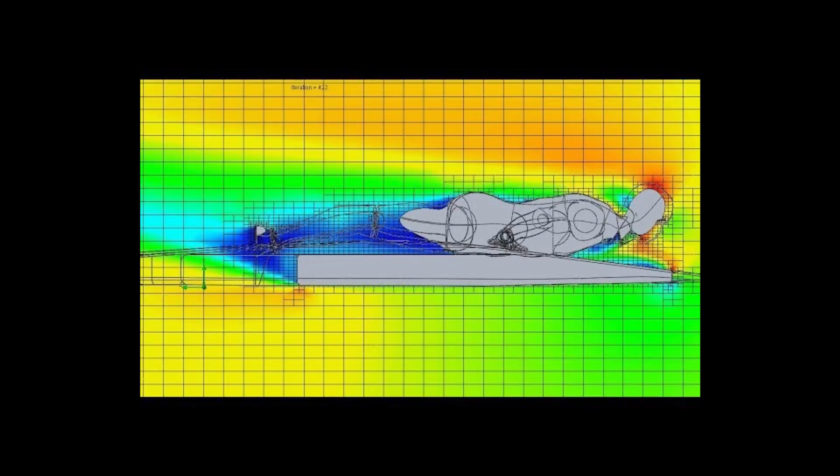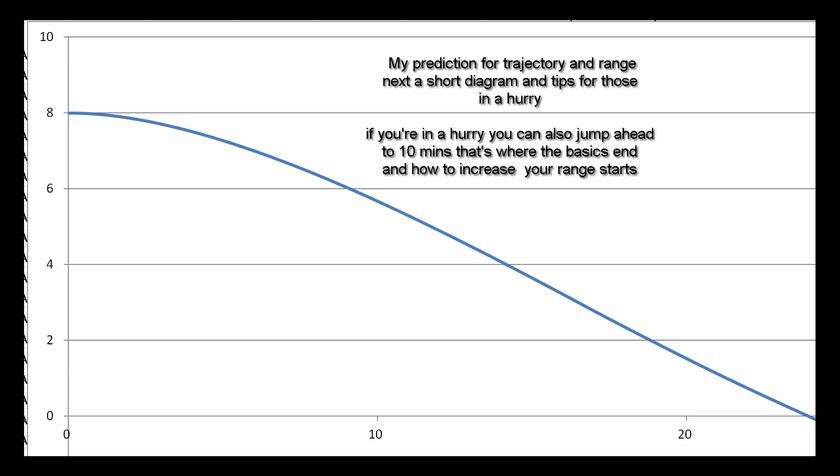Also, this video is somewhat specifically directed at other German people, and I am also German, but I will still make this video in English because it's just the most understood language, and I don't want any English speakers who stumble over this video to just sit there with Fragezeichen over their head and no idea what's going on.

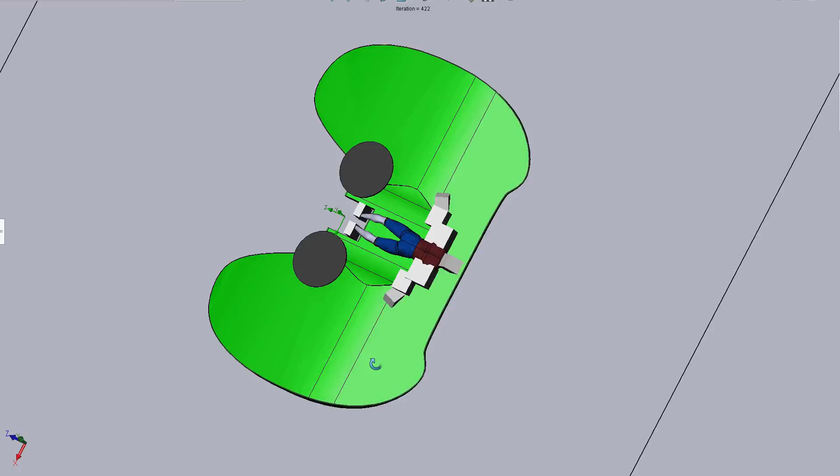So today's video will be a response and analysis to some German YouTubers' first attempt at aviation. I'll keep this short for those who already know, but a short introduction for those who don't know yet. There is an event called the Red Bull Flugtag or Red Bull Flight Day, which, as Wikipedia describes it, is an advertisement event where competitors, quote-unquote, though translated, plunge themselves into the water in self-built, in quotes, flying machines.

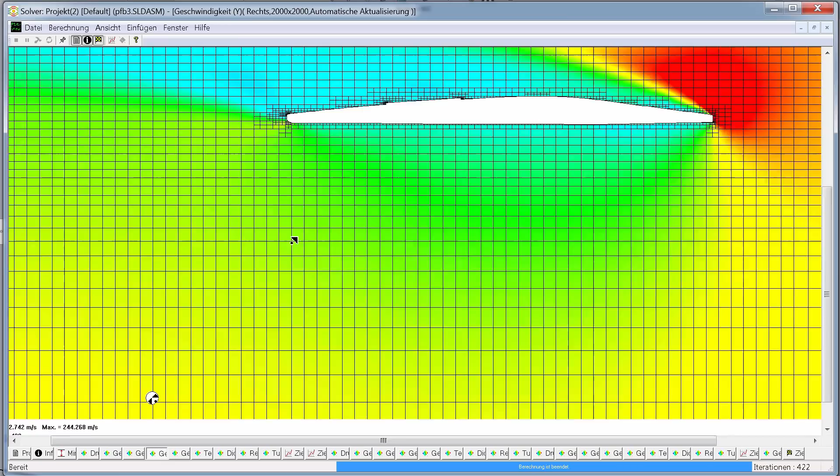So it's a tiny bit off topic for me since it's not the most advanced or professional rocket science ever, but it's all just for fun, and sometimes some actually skilled teams do get quite a distance. They basically jump off a ramp in a muscle-powered or unpowered, uncontrolled glider and glide a few meters down into the water and see how far they can get.

We have, by the way, used this event as an example in university before, though not for an actual technological topic, but actually in a course about English in science and technology, where we've just used it as practice material for talking about it in English, irony going full circle.

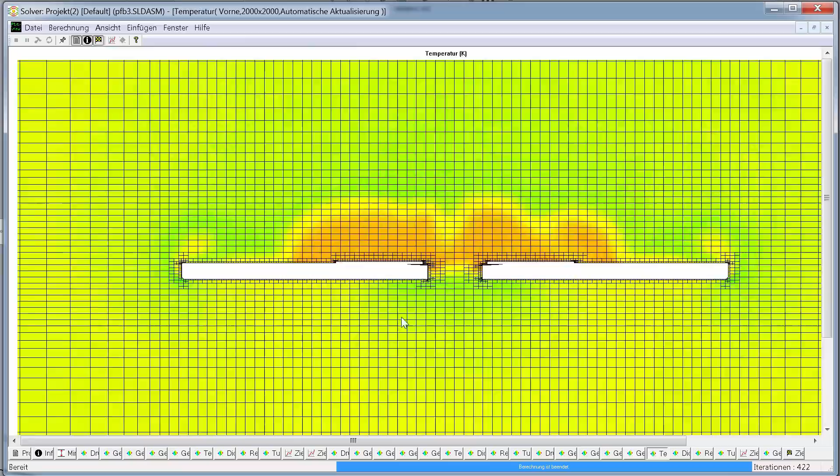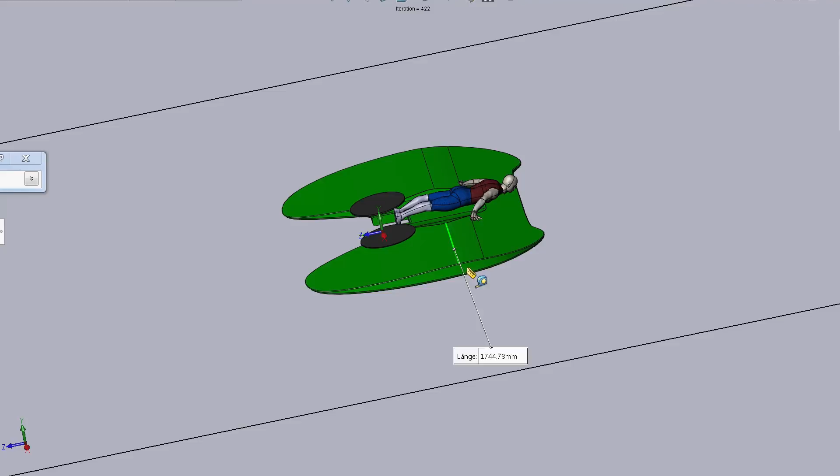Now the reason I'm making a video about this is because some other German YouTubers are competing in it this year, and they too are a little bit off topic for this channel maybe. Usually if I recommend someone, it's also someone who talks about science and spaceflight or astronomy. In this case, they're just some slightly weird German comedian slash let's player group called PietSmiet, but I like them.

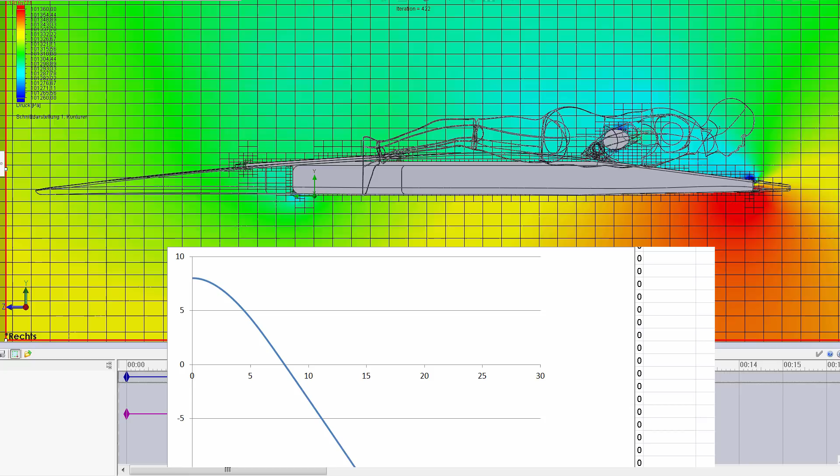I've been watching them for a very long time, and so when they got the chance to get together with another German YouTuber called Nerdy Timber, who makes big things out of wood basically, and two other German YouTubers to build a quote-unquote flying machine for this advertisement event, I thought I'd take that as an opportunity to practice some aerodynamics, explain some basic flight dynamics and aerodynamics on a somewhat entertaining example, and of course give them some final tips for how to get further.

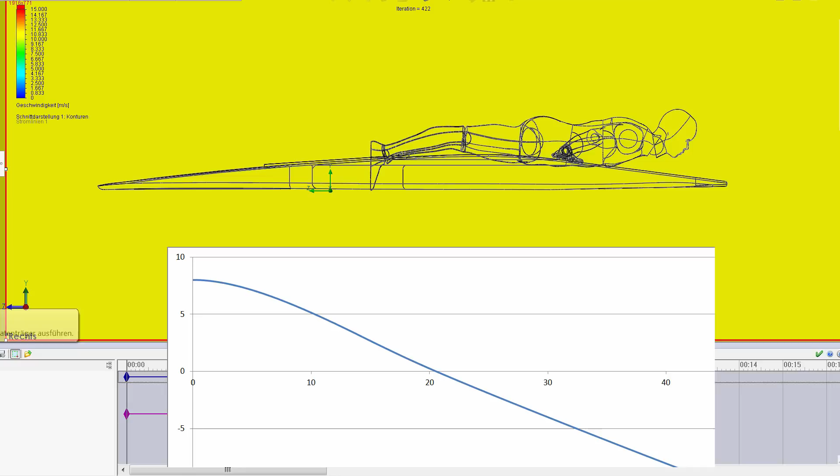So first of all, the very basics, though I already have to clear something up that is sometimes a bit confusing and a bit argued over. What is aerodynamics and what is flight dynamics? This is sometimes a bit confused, and you often see articles or videos called The Basics of Aerodynamics that have absolutely nothing to do with aerodynamics at all and only flight dynamics. So let's give a quick overview over these fields and my methods here.

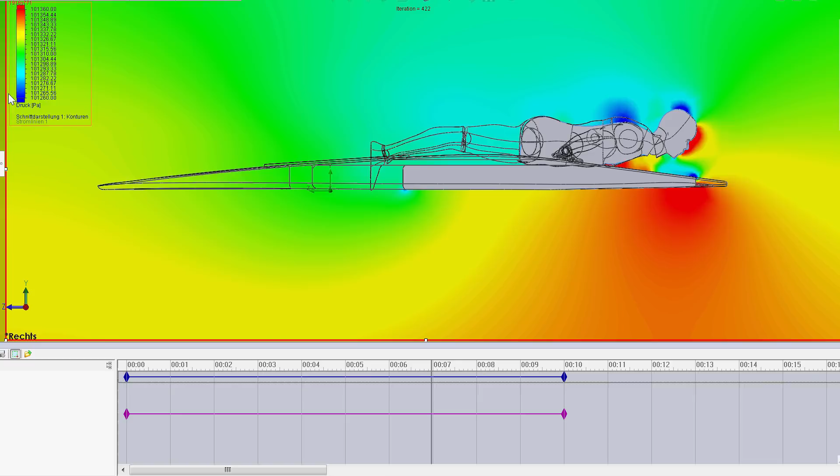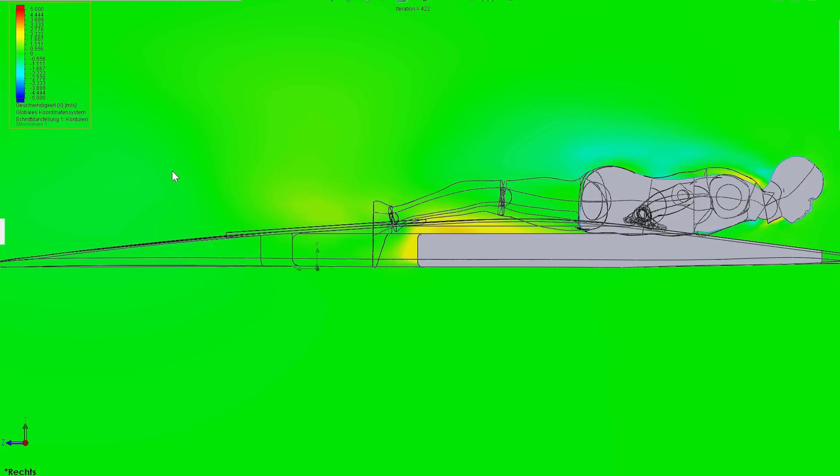So first of all, aerodynamics. Aerodynamics is purely the study of air or sometimes other gases flowing around a geometry. Aerodynamics does not care how heavy your flying machine is, where its center of mass is, or what you're planning to do with it. According to aerodynamics, your flying machine might as well be a hollow surface, since aerodynamics is only the study of how air streams around your flying machine or any other object under certain circumstances.

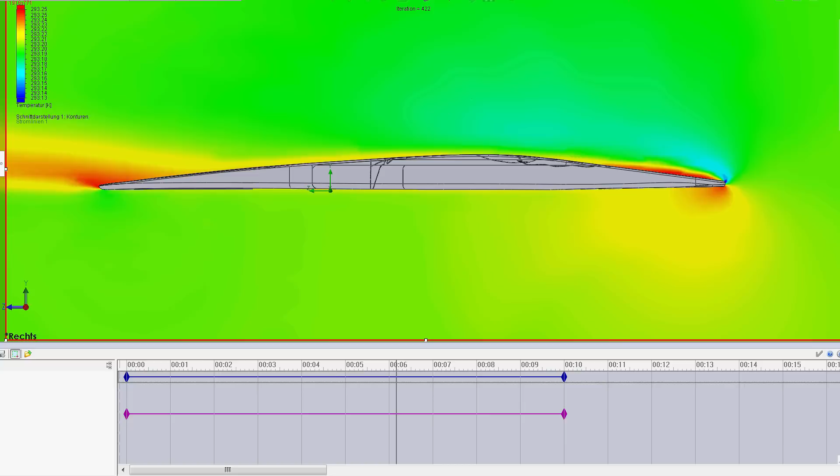So you have your geometry, your size, your outer surface, which might be rough or smooth. You have air approaching it at a certain speed, at a certain angle, with a certain temperature, and maybe the surfaces have a temperature too. And you might have an engine, a propeller, a turbojet, or a rotor or something, and the air streams around that, and you study how the air interacts with the surface and with other air, and changes pressure, and goes into turbulence, and so on. And this can be simulated with quite a bit of detail, though it's actually not an exact science yet.

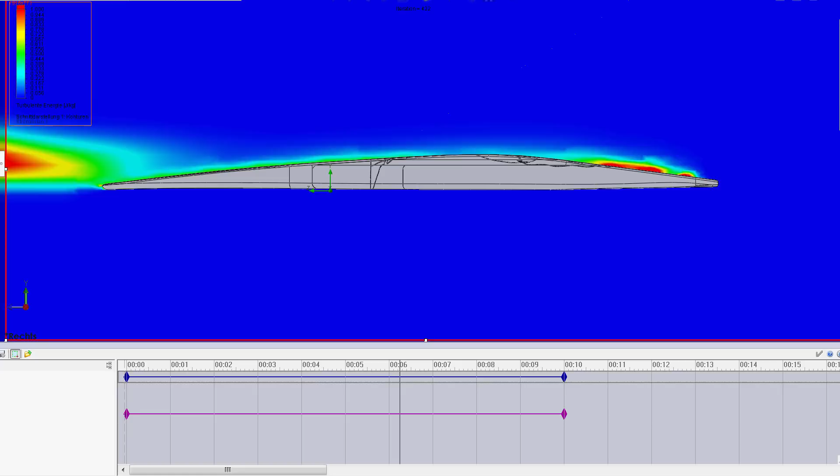The thing is, we do understand how it acts on a large scale, and we do understand how it acts on a very, very tiny scale. We have a very rough idea of how air molecules or atoms in air interact, but those are so many that it basically comes down to statistics, and how air actually acts in a larger quantity is somewhat experimental, and you have to get experimental values which you can then add into a numerical simulation.

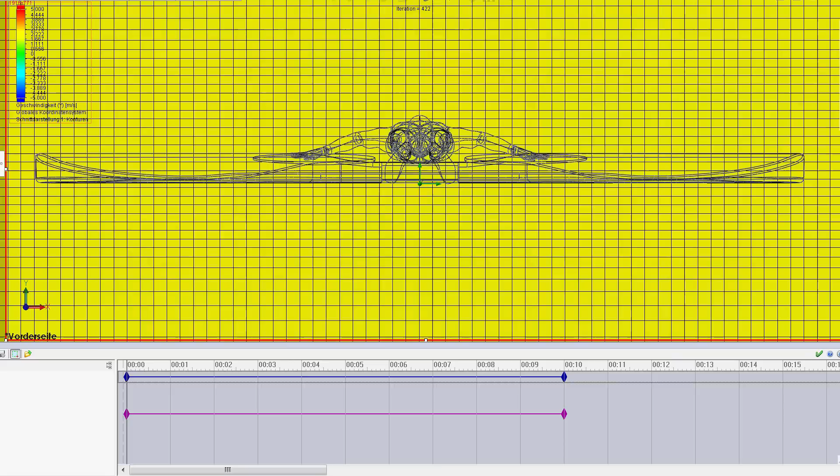Nonetheless, with enough detail, you can get a somewhat accurate idea of how air reacts if it streams onto a certain geometry at a certain angle and speed, how much pressure builds up on which surface, and what kinds of forces then act on the flying machine. So you get a rough graph or table or list of numbers for different speeds and different angles of attack and side slip and rotation and so on, and you get a list of forces acting on each surface of the flying machine, which you can work on and extrapolate on.

Flight dynamics goes the next step, and flight dynamics no longer really cares about the specific detailed interactions of air. It just takes these tables that aerodynamics essentially outputs, and then takes the center of mass of your flying machine, the weight of your flying machine, the thrust of your engines, and so on, and looks at how the aerodynamic forces acting on the surfaces change the path of the flying machine, change the speed of the flying machine, how they create torque and turn the flying machine, which then in turn changes the aerodynamics, changes which numbers you basically look up in these tables.

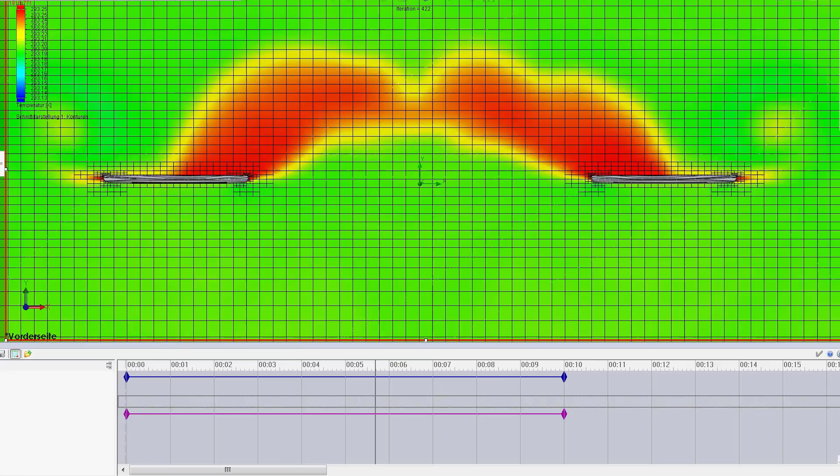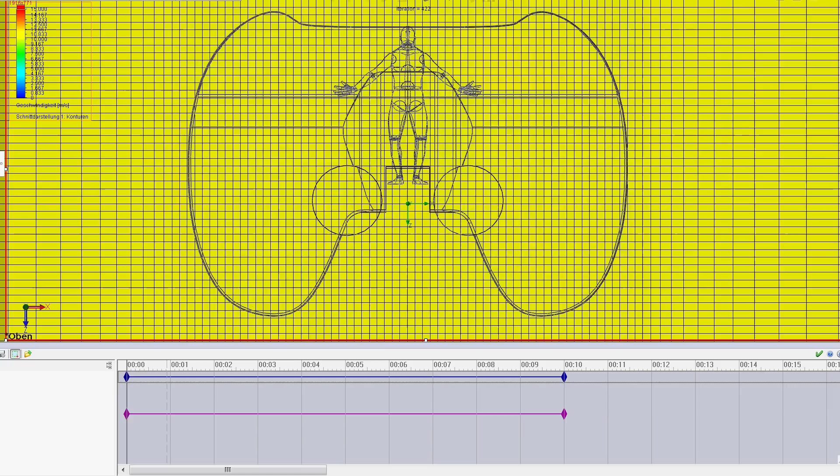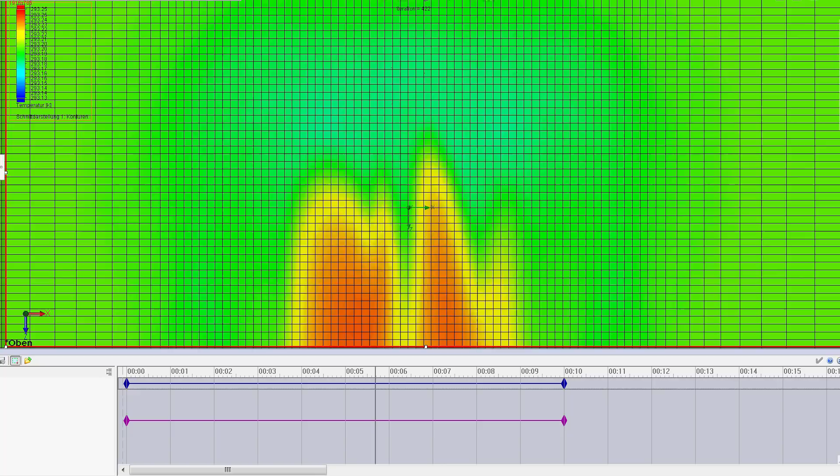And this is where, for example, terms like aerodynamically stable or unstable come from, whereas stable means that if you deviate from a straight path, that will result in forces that basically turn you back onto that straight path, whereas unstable means if you slightly deviate from a straight path, that will result in forces which turn you further in the same direction and make you further deviate from that straight path, making you unstable. Basically, as soon as you turn slightly off your path, you instantly backflip against your will, whereas stable means you are turned back forward.

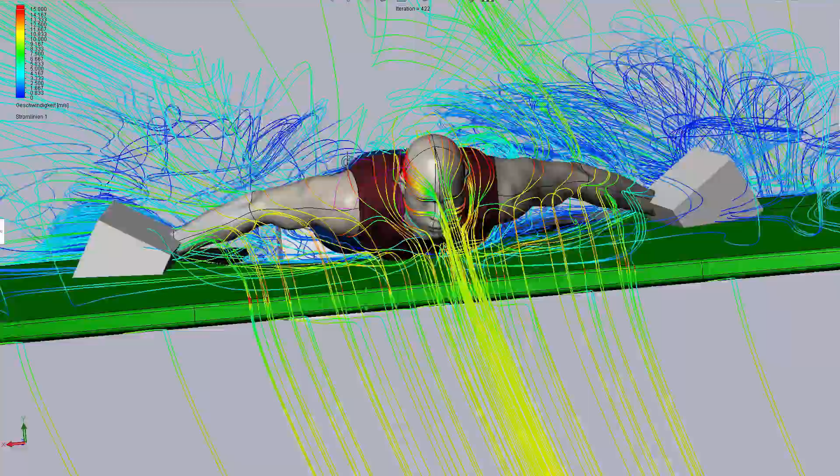Of course, nowadays with modern computers, that is modern supercomputers of the kind I don't have, the kind that cost several $1,000,000, you can do some much more complicated simulations where all these fields interact, structural analysis, flight dynamics, aerodynamics, and then you get into aeroelastics where you look at the feedback loops of how aerodynamics creates a force on a wing, that force bends the wing, that changes the geometry of the wing, that again changes the aerodynamics, that changes the force on the wing, that changes how the wing bends, and so on, and that gets you a feedback loop which you can analyze, and you can do that all in detail using numerics if you have the computing power.

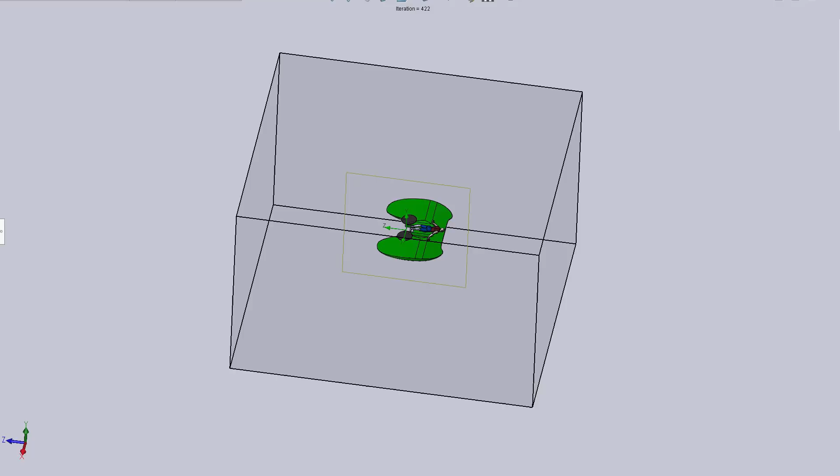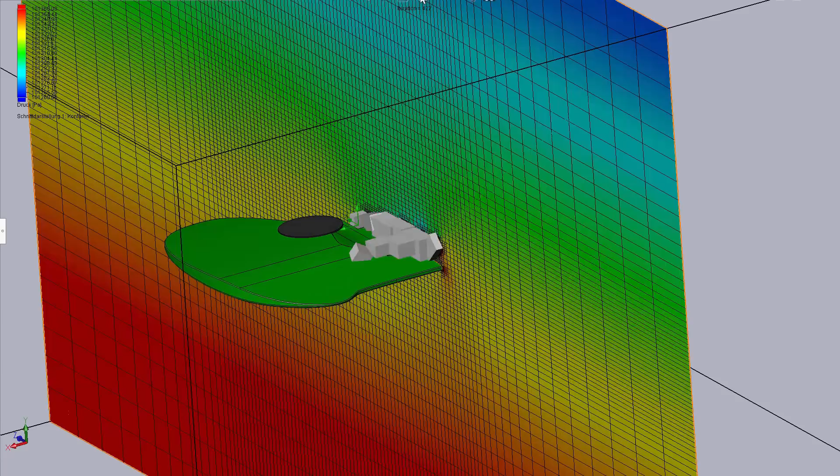But for now I've just started out with doing a basic aerodynamic simulation. I've used the 3D model they uploaded, the measurements and sizes from that 3D model, as well as the video of the flying machine that we already have, to make a rough model in SolidWorks. I then added a human dummy figurine, which is actually something I'm practicing for the first time, since until now I have done quite a few aerodynamic simulations, but usually on either unmanned drones or large aircraft, or at least something with an enclosed cockpit. This is the first time I'm actually using a human dummy to represent an open cockpit glider, or a glider where the human is basically just lying on top.

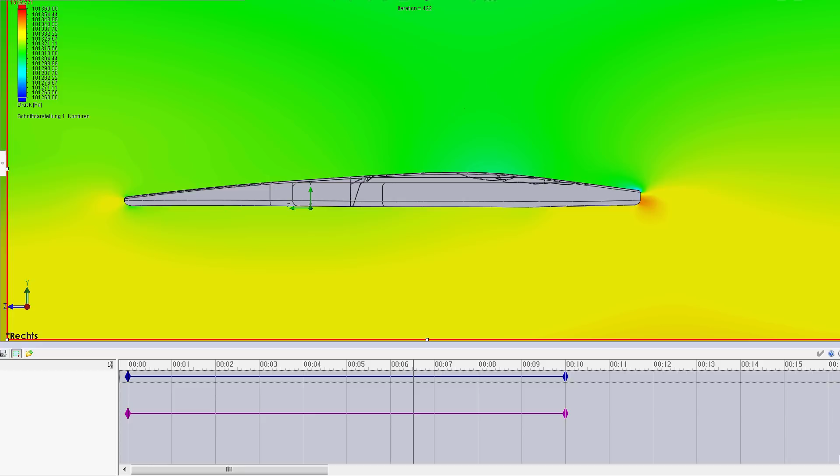So the flying machine looks like a giant PlayStation controller, which is basically their logo, their symbol, and it's not aerodynamically perfect, but that's not the point. It's just for fun. It has to look this way, and it actually turns out surprisingly well. So you take the outer shape, the outer surface of the 3D model, and you take the space around it and separate it up into tiny cubes or cells.

At varying levels of detail, these cells interact with each other, and then you basically go to sleep while your computer works, and when you wake up it has finished up some colorful images of how pressure and speed and turbulence is distributed around the machine.

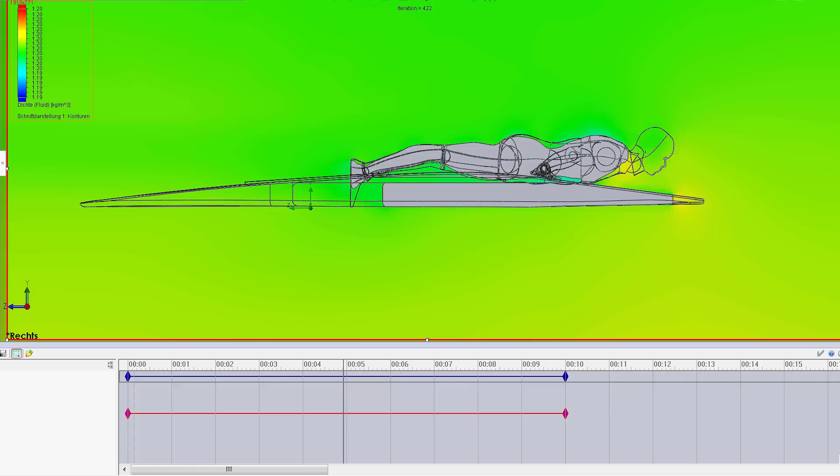With some understanding of basic physics or a bit of experience, you can of course tell some interesting things from these images, like where the average forces are applying, if that thing would be stable or unstable, if there are any critical errors in the aerodynamics. In this case, the only really big issue is that it's slightly stall sensitive, at least without the pilot.

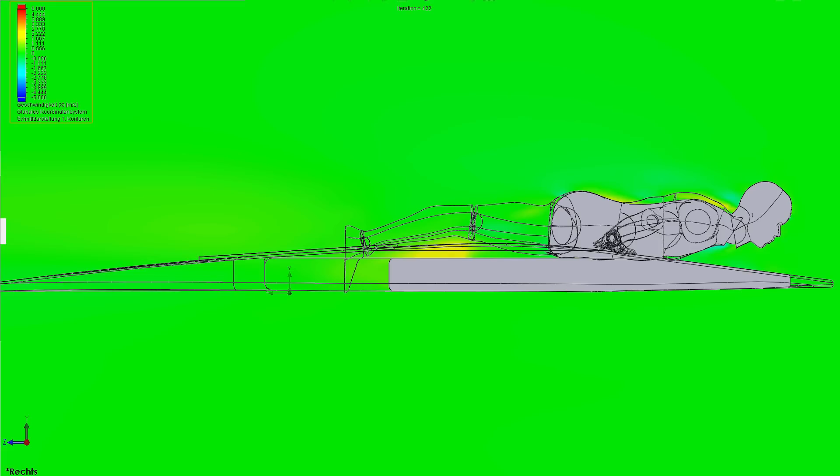I did a simplified simulation without the pilot at first, and that turned out very sensitive to stall because of these bumps in the front of the machine and the straight line connecting them, which basically catches air and turns it into turbulence above the center of the machine.

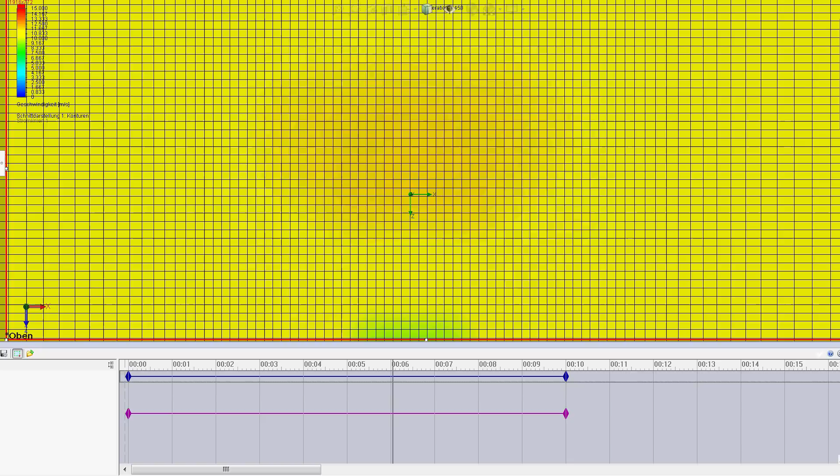Now with the pilot that's actually a bit less of an issue, since the pilot causes some turbulence anyway, but relatively harmless ones that basically counteract these turbulences caused by the straight edge at the front.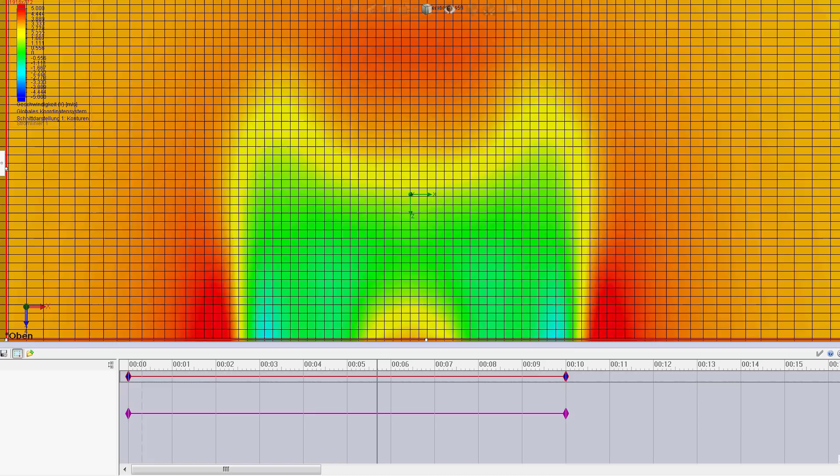I have also uploaded some detailed long videos of the whole analysis of all the colorful images of pressure and airspeed, so you can look at all the details. They're relatively long, no commentary, relatively boring, but if you are interested in the actual details, you can check them out.

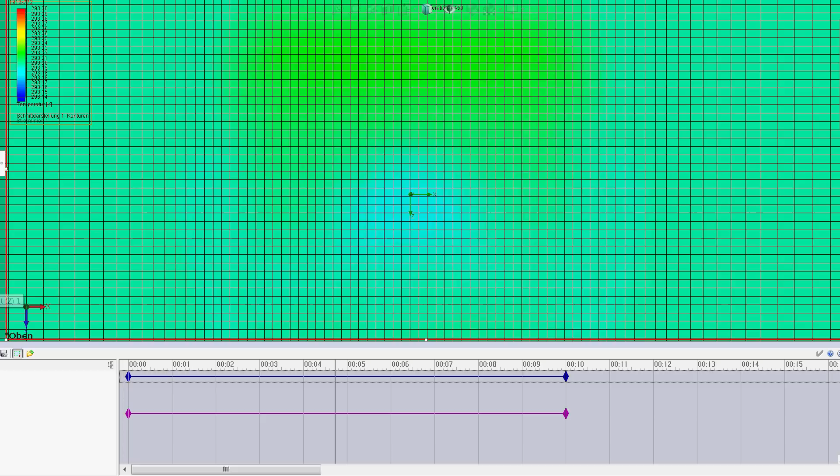Then I looked at these images and actually analyzed them and got the actual forces acting on the machine, the drag, the lift, where these forces on average act on the machine, and that is where we go into flight dynamics, which is basically Newtonian mechanics. We can draw up a very simplified sketch here.

We have the rough outline of the machine, the center of gravity, and that's where we get a little bit of an issue because the pilot is resting on top. And writing with the guy who built the machine, I read that it's roughly 27 kilograms heavy. I'll estimate the pilot at some 80 kilograms or something roughly around that area. So the whole thing is going to be a bit over 100 kilograms, and the flying machine itself is going to contribute the lesser part of that.

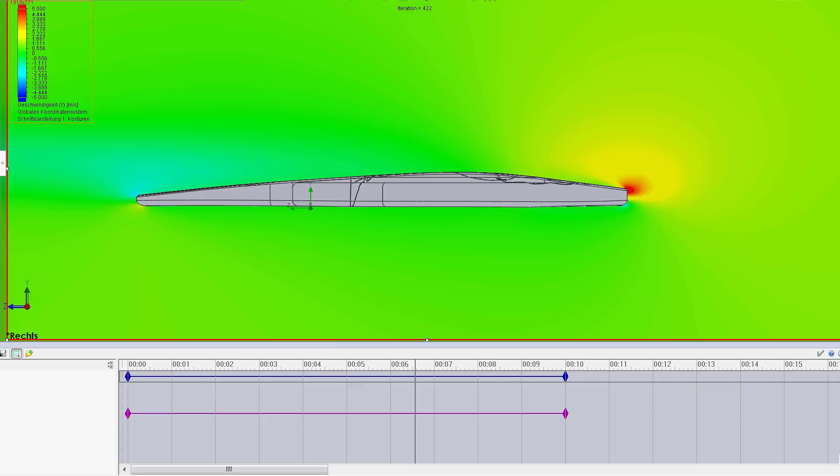So the center of mass is going to be closer to the pilot's center of mass than the machine's own center of mass, which means since the pilot is resting on top, that the center of mass is going to be above the flying machine itself, which is a bit of an issue because while humans do cause some drag, the machine is much bigger.

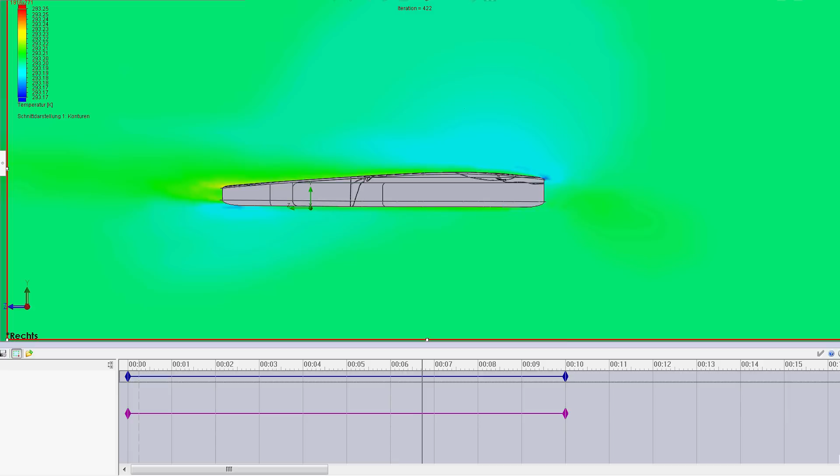It has large wings which are somewhat aerodynamic and don't cause too much drag, but still more than the human, and so the force of drag, the force pulling you backwards as you move forward, is attacking below the center of mass, so the whole thing gets turned around its center of mass basically. So the lower side gets moved backwards, the upper side gets moved forwards, which basically means the nose moves down and you nosedive.

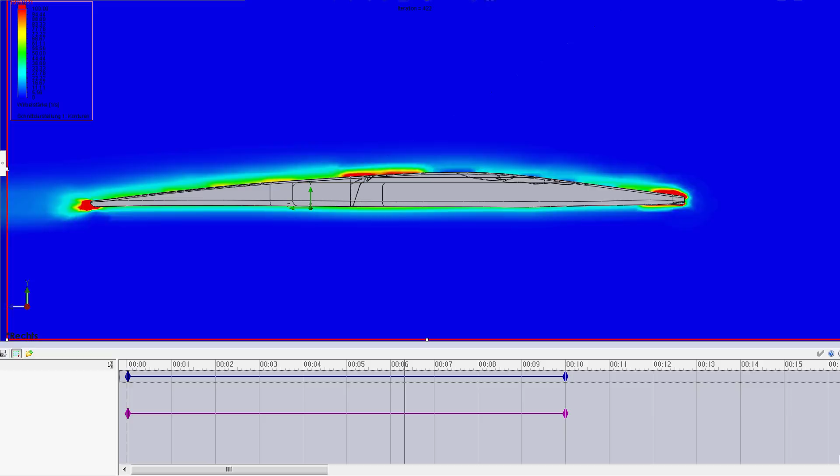However, that's actually not that big an issue, since the whole thing is actually not going too fast anyway, and the drag itself, the parasitic drag as we call it, the drag actually caused by the edges in front and the roughness of your surface and so on, is relatively low, and the strongest forces will be lift.

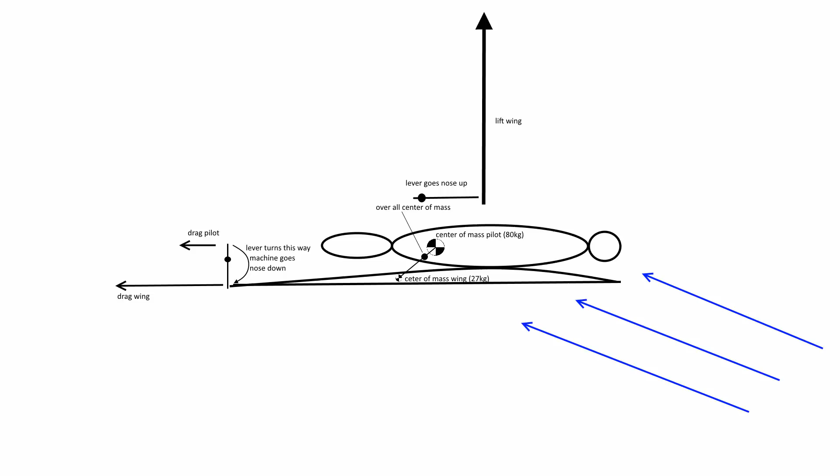So the main part of drag too would be induced drag, that is the drag caused by your own lift and the angle of attack of your wings, where your wings are angled upwards, so your lift is not going straight up but slightly angled, and thus it also pulls you backwards a bit, and that induces a drag called induced drag, which is a direct side effect of lift and thus also attacks in an angle, basically upwards.

So the forces actually pulling the machine straight backwards are actually relatively small. They also attack with a relatively small lever, since the whole thing is rather flat. After all, the pilot is not sitting but lying on top of it.

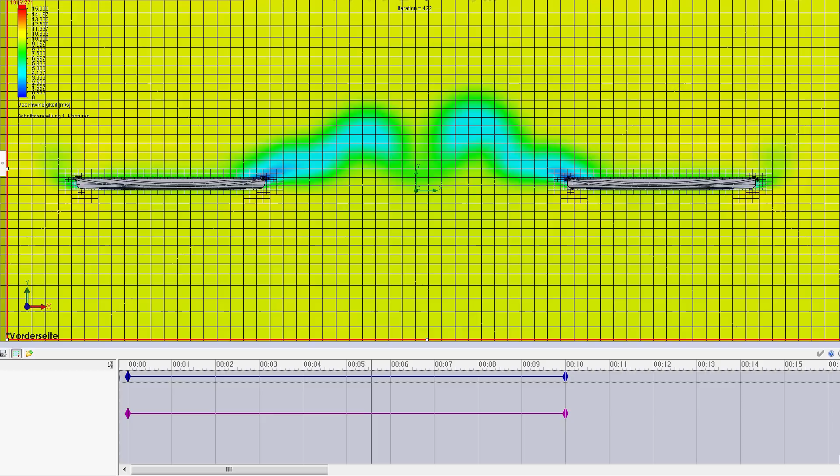And the forces that mostly dominate how the machine will turn and rotate and flip back or forth will be lift itself, and the center of lift, or where the lift attacks under the wing on average, is actually somewhat well lined up with the center of mass, so it shouldn't turn or spin too much.

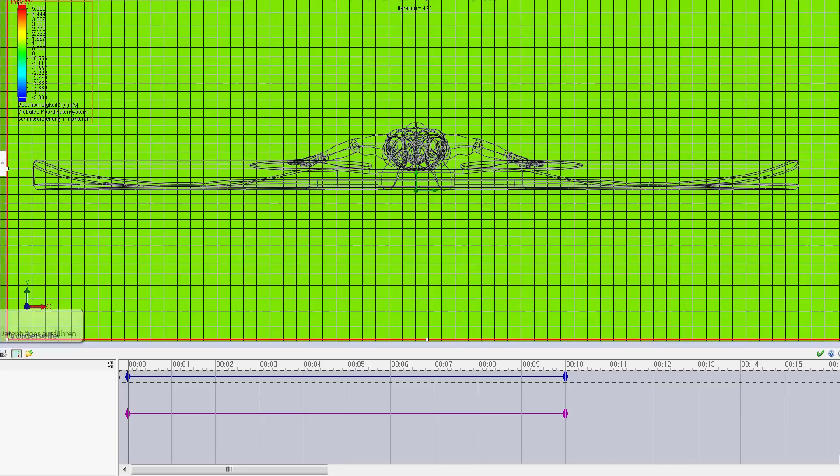Also, of course, jumping down 6 meters, it won't be the longest flight ever, so the machine might simply not have quite the time to actually start rotating, rather just staying close to its original flat position, so stability and such aren't actually that relevant here.

As far as control goes, it will basically be like balancing on a huge gymnastics ball. As the pilot, you can shift your weight forwards or backwards, and if you slightly shift your weight to the tail end of the machine, you will start pulling your nose up, whereas shifting your weight forward to the nose of the machine will basically initiate a nosedive.

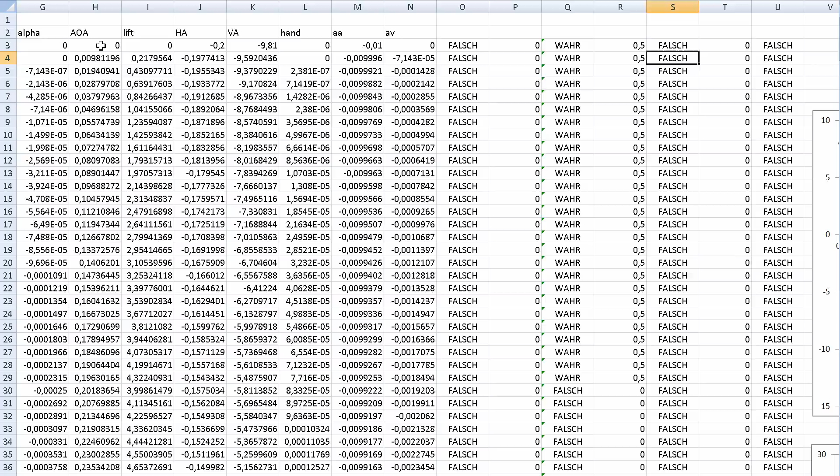So you can try to keep the whole thing somewhat controlled by moving your hands back and forth, but that will hardly be needed over the short time that it will fly. I have actually gone for a trajectory simulation where I've used Excel, since it's not that complicated, it doesn't really take anything more advanced. So this is again just a basic recursive simulation.

You start with your starting position and your starting speed, and then you calculate from that position and speed the forces acting on the machine, extrapolating that from the data points you got from your aerodynamic simulation. You calculate how fast the machine will turn and how that will change the angle of attack and the lift.

And you do that basically in 1/100th of a second steps, and then you enter the next speed, which is a result of the acceleration, and the next position, which is a result of the last position and the speed. Of course, in Excel you can just pull that down and it does that automatically.

So I have roughly calculated for you what your flight trajectory might actually look like, and how far you can get depending on how fast you start, which is very critical. I've plotted the flight trajectory for different speeds, and I've also plotted the maximum distance you could reach as a function of the speed you start at.

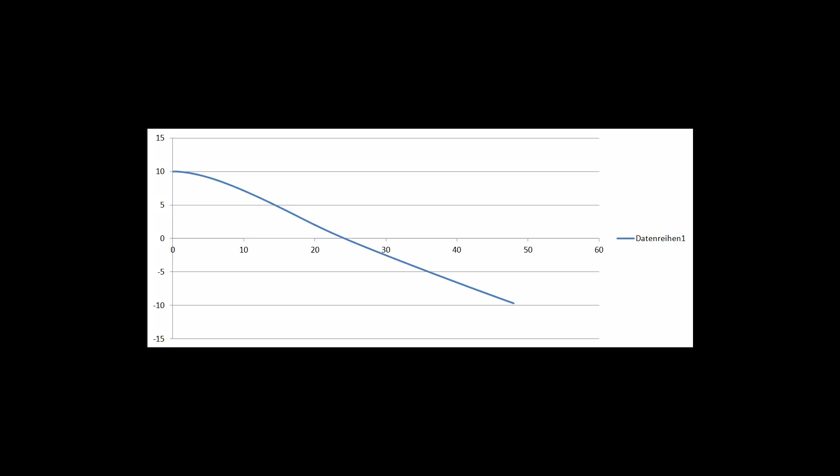The machine, as far as I've understood, will be started by pedaling on bikes and pushing it forward. Now, I'm an aerospace expert, not a human athletics expert, so I don't really know how fast exactly that might get. It is a rather special situation too. But as a good guess, I've given roughly 10 meters per second, which is also where you basically start to fly, where your aerodynamics start having a significant impact on how far you go, and you actually go significantly further than just a concrete boulder.

Now 1 meter per second, of course, is 3.6 kilometers an hour, so 10 meters per second are 36 kilometers an hour, or 22 miles per hour, or roughly 20 knots. And here I've plotted the range you could reach for a given speed compared to a block of cement just tossed at that speed without wings.

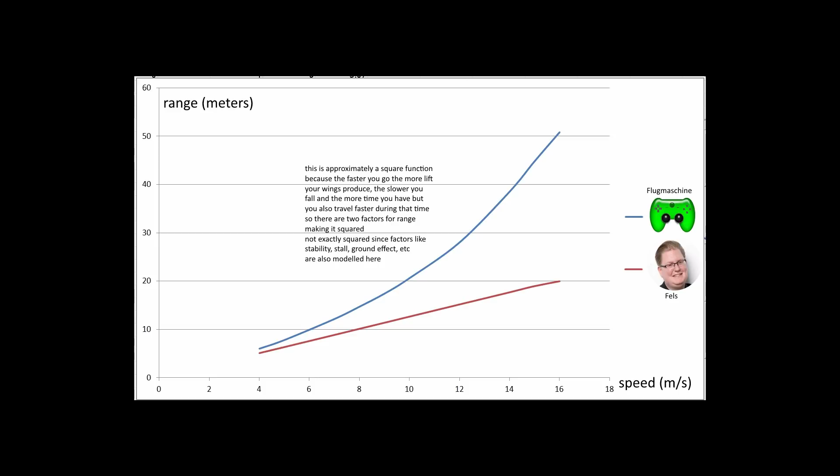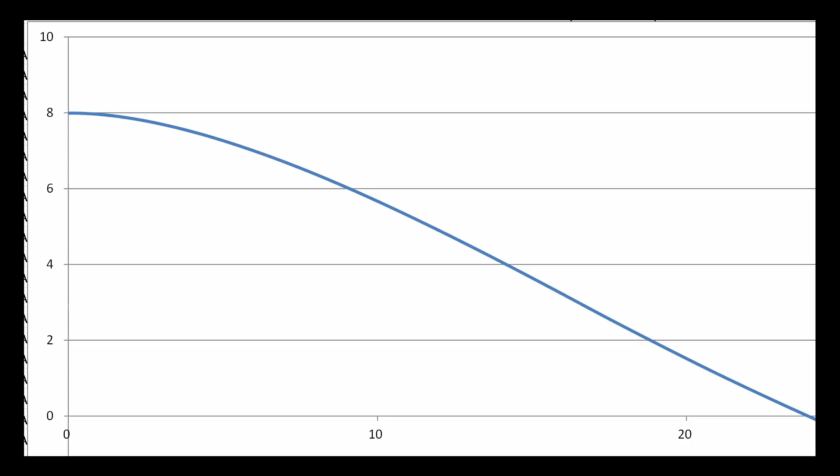And you can see in the beginning at some 6 or 7 meters per second that is a very similar range, and as you approach 10 meters or 12 meters per second you can get a lot further than a boulder tossed at the same speed. And of course I'm hoping for you that you can go fast and crack the 20 meters, maybe even the 30 meters if you can go really fast. As you can see, it would take you roughly 15 meters per second or 54 kilometers an hour to beat the world record in this type of jump.